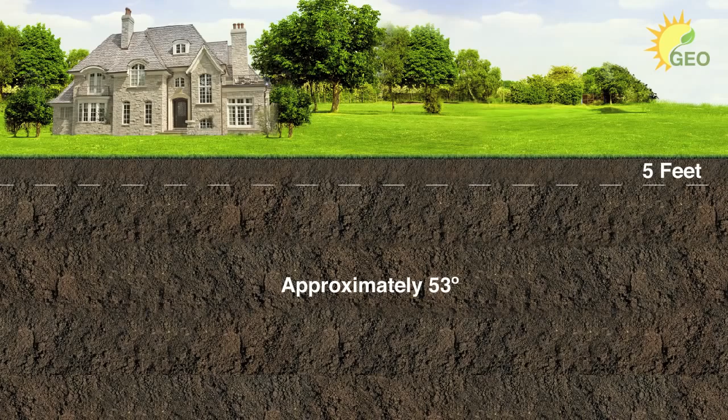Direct exchange geothermal, or DX, outperforms water source geothermal systems by 25% and is the most efficient system on the market. That's because DX does not require electrical circulators, which use additional electricity. DX only requires one heat transfer, and DX utilizes copper piping, which has superior heat transfer properties instead of the plastic tubing used in water-based systems.

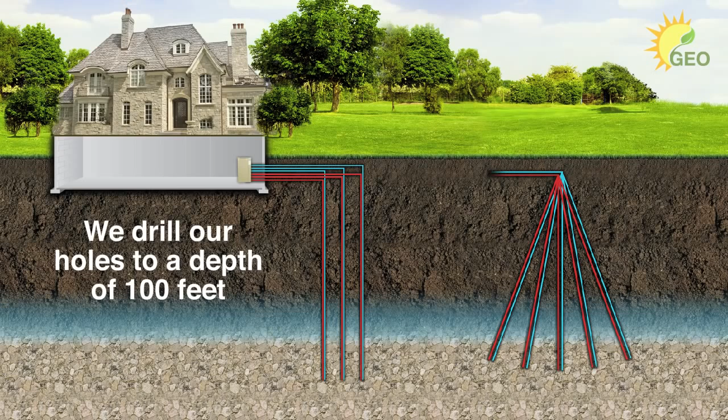Our equipment and installation are what separates us from everyone else. We drill our boreholes to a depth of 100 feet. When drilling to 100 feet, we are very likely to encounter moist soil and/or rock conditions, which are preferred for conductivity. Each borehole is drilled vertically and is spaced 7 feet apart.

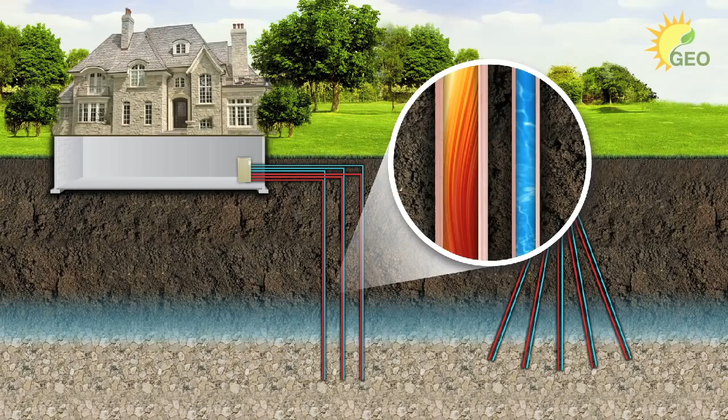This prevents the phenomenon of ground loop interference. Envision each borehole as a 7-foot diameter cylinder that uses this area to gather the Earth's energy. When ground space is a concern, a teepee-style or slant configuration can be used to reduce the area needed for drilling. Notice the reduced surface area needed at the top of the boreholes.

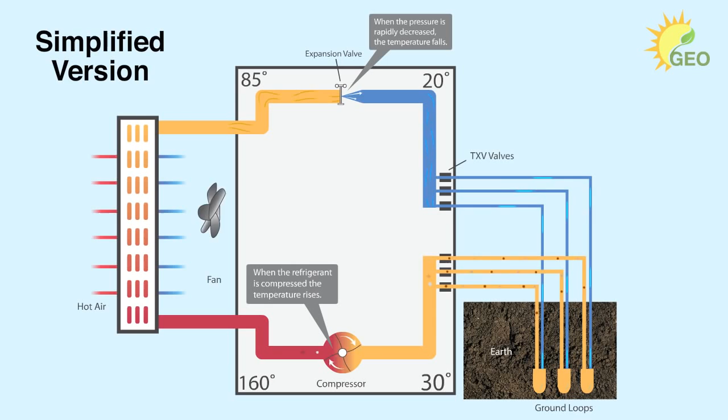Here's a simplified version of how a heat pump works when heating your home. All heat pumps have a compressor and an expansion valve that manipulate refrigerant. A refrigerant has 2 phases, gaseous and liquid. Refrigerant works on the basic principle that if you raise the pressure, you raise the temperature. If you lower the pressure, you lower the temperature. This is all done with a compressor and an expansion valve.

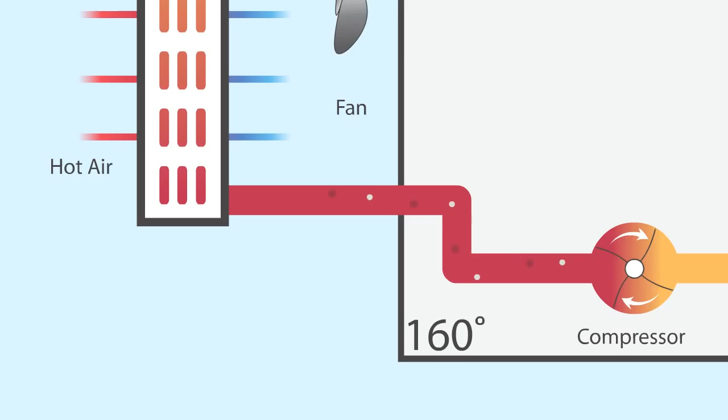Let's say the refrigerant starts its journey in its gaseous state and enters the compressor at 30 degrees. The compressor compresses the gas, which increases the pressure and raises the temperature to 160 degrees. The refrigerant travels to a coil where a fan blows across it. The air blowing across this coil absorbs the heat energy and distributes it throughout the home.

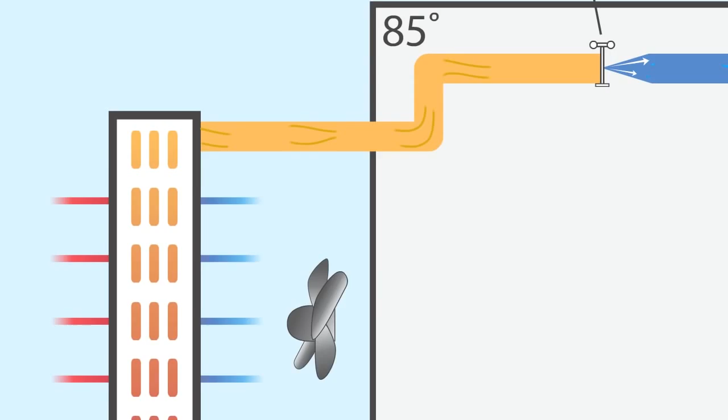As the refrigerant leaves the coil, it condenses back to its liquid state and moves toward the expansion valve at 85 degrees. The expansion valve is basically like a dam with a small hole. When the refrigerant passes through the expansion valve, the pressure rapidly decreases and the temperature falls to 20 degrees.

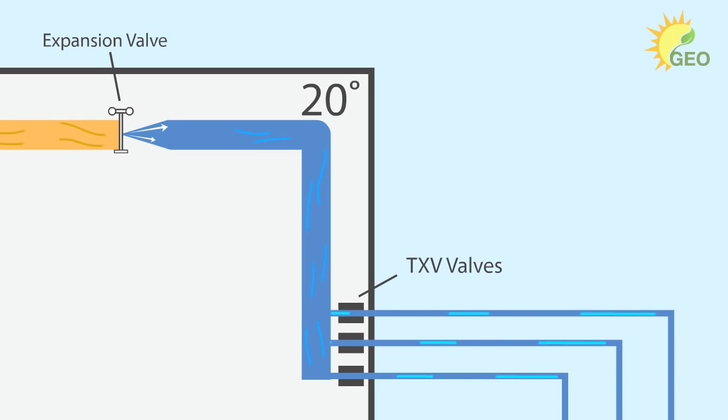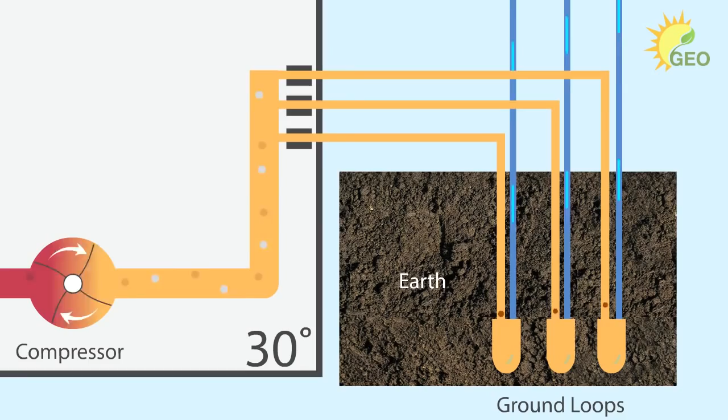It then moves toward the TXV valves. These valves control the amount of refrigerant distributed to each ground loop. The refrigerant is then piped out to the well field and down the vertical boreholes where it begins its transformation back to a gas. As it transitions back to its gaseous state, it absorbs heat energy from the Earth and travels back to the compressor where this ingenious process is repeated.

When cooling is desired, this process is reversed.